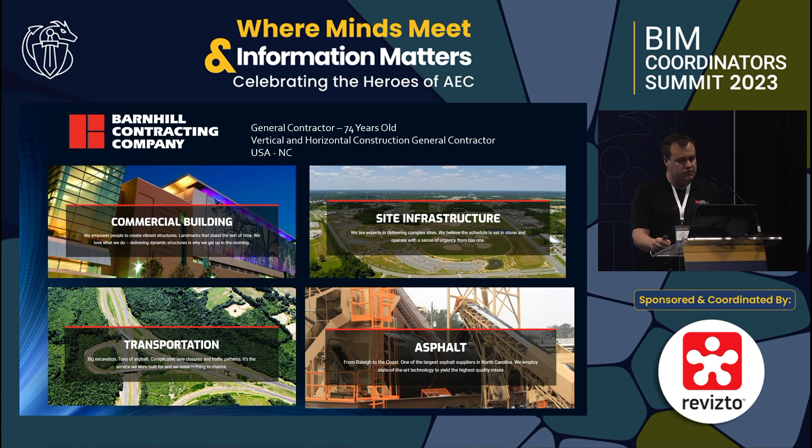And we're kind of unique. We're actually a horizontal and a vertical builder. Typically, you don't see both of those all encased into one. So we do vertical construction, site infrastructure, transportation, and asphalt.

This is what everybody understands about where constructability is and where the industry is, right? The top 5 things, and the comment that we're always made is we always got at least 2 of the 3. It was either going to be on schedule, on time, it was going to have a cost, and then the quality. Now it's very hard to get one of those things, and clients more and more are trying to understand why that's happening. And there's a variety of reasons.

But one of the things that we as an industry, especially as the GCs that drive that process, we have to fundamentally change the way that we produce constructability reviews, right? It's always been to a point where we were on 2D drawings, and now we got to take that to the next step and bring in the 3D environment even more.

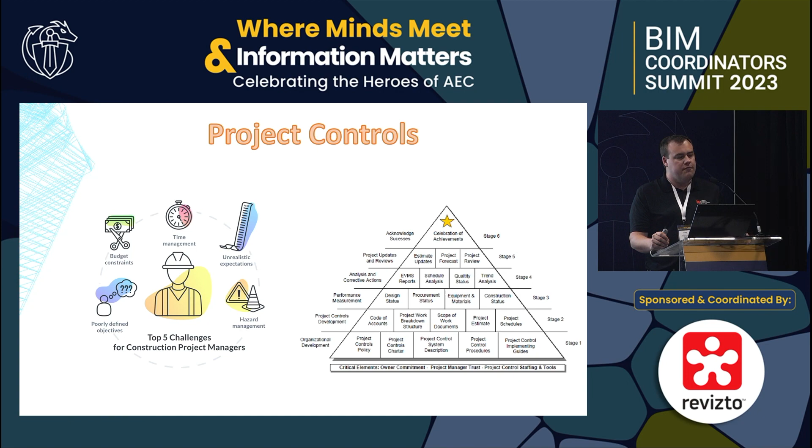And that process of being successful with those top 5 challenges of project managers all leads to the pyramid that you see there, and everyone in this stage and in this space that we're in understands that this is the process of what it takes to be successful, and then hopefully at the end you can celebrate those achievements and cut the blue ribbon.

So what is constructability? It's a pretty straightforward term for most of you here in the stage, but more broad to the industry is how buildable is it? And it's just a technique that's used to be able to look at a process in pre-construction and work its way all the way until we get to construction, and then it turns into coordination.

And what we've done over the years, in the last 10, 15 years, is we've used the model in the coordination predominantly. But what we've got to do is we've got to really start to do what everybody else has talked about and bring that more into the pre-construction aspects as the new technology progresses.

And the idea is to identify these different aspects. How much is it going to cost? What delays could we foresee happening? And then where's the overruns or quality going to suffer? The projects are getting more complicated.

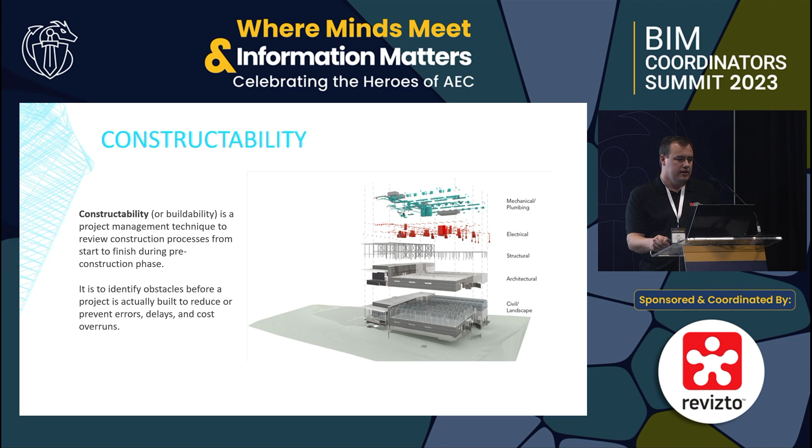And that's what's interesting about this structure, is that it's a really beautiful glass structure, but if you do something on one side of it, you got to do it on the other. It's completely imbalanced in how that works. And there's only so many in the world that look like this.

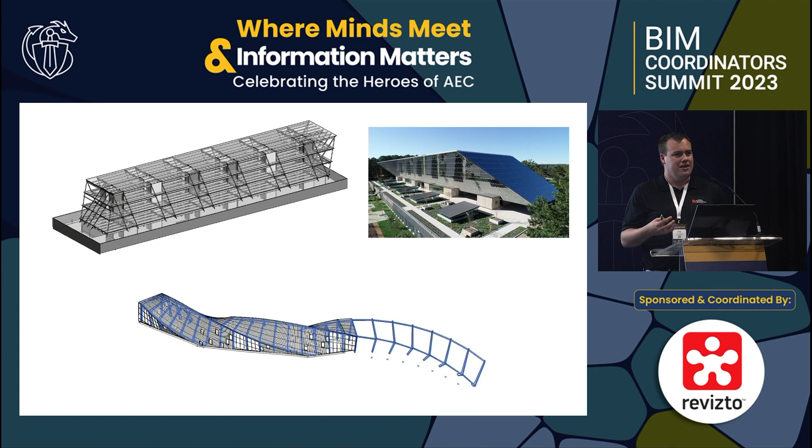The other one is kind of unique. It was a project that we were working on that was for a DNA company, and they wanted to construct something that looked like a DNA strand. That's pretty hard to do, and so trying to work through those processes of does this make sense for the company? Are you trying to use this as an architectural feature, and is the end use what you wanted to see?

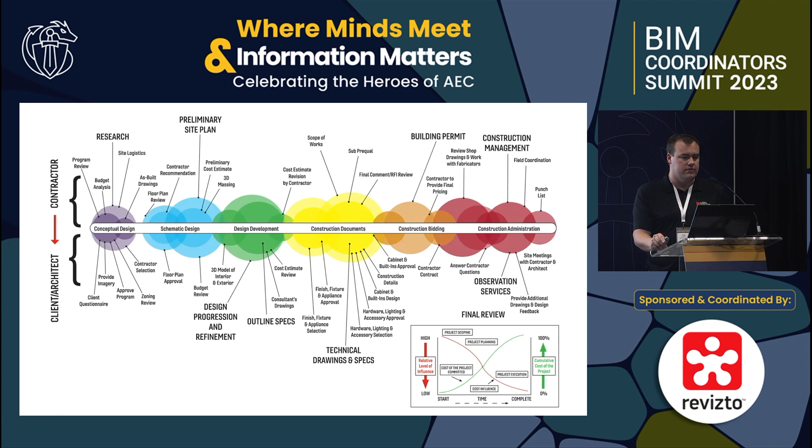So in the front end of this, as we're working through this massive ordeal of all these different people that are involved in this process, that constructability aspect is very important. And it is really focused on the left-hand side of the page.

But what we have to get across to the massive industry that we are in is that it incorporates the way that we're going to build the building as well, and use that model not just for coordination practices within it, but also to use it for estimating, to use it for scheduling, to use it for logistics and how we're going to physically build the building.

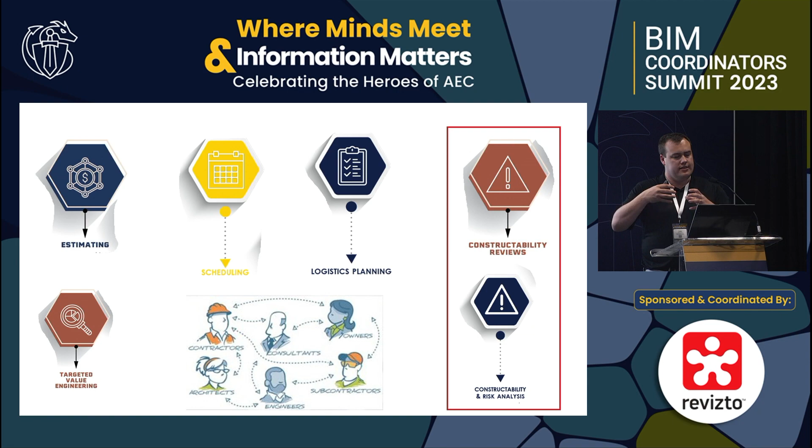Because in the world we live in, we have always fallen into this process that the model is static, but we're building a dynamic world. So that's not something that we need to continue. We need to take that and incorporate all these different concepts together. Put that model of what it was always meant to be in the center of this whole process, right?

And yes, there are things that we have to get better on for every single part of the circle, right? The circle is what we do every single day as a GC. We have to look at the expectations of what the owner is providing us through the lens of the designer and work through those processes through design. With that, as we've talked about, fabrication and logistics and 4D and scheduling costs are all important while we're in the process of building the building.

But what if we could start that a little bit sooner in that process? And then finally, as other stages talked about today, digital twin is going to be a major part of operation and maintenance in the future. So why not talk about that at the very, very beginning of a project versus waiting until we get involved in it? And in the States, it's become a really big issue.

To the point that a lot of state representatives across North Carolina and other states have said that GCs are failing at constructability reviews. We don't have the right people in place to do it. We don't have the time to work on that. So those are the things that are kind of frustrating, right? If we don't take the time up front, then we're going to get really messed up at the back end of it. And it involves two different pieces.

We have an aging workforce that is going to leave us in a very, very short period of time. And we have a young workforce that's eager to join us, but they don't understand where they fit into that industry. And so with those two perspectives, we have to bring them along to get them to a point where they can take over for the next group. Just as we staff projects with the experience that we have, we need to staff constructability reviews at the front end a lot better with experience and with new talent.

With being able to do that, you could take the ability of completeness and assign that to somebody that's brand new in the industry, right? Because in this process, they're learning the ways of what we do every single day. And then on the back end, you have the person that has 35 years, 40 years of experience. And you allow them to analyze the building components and bring the completeness together to complete a constructability review more effectively.

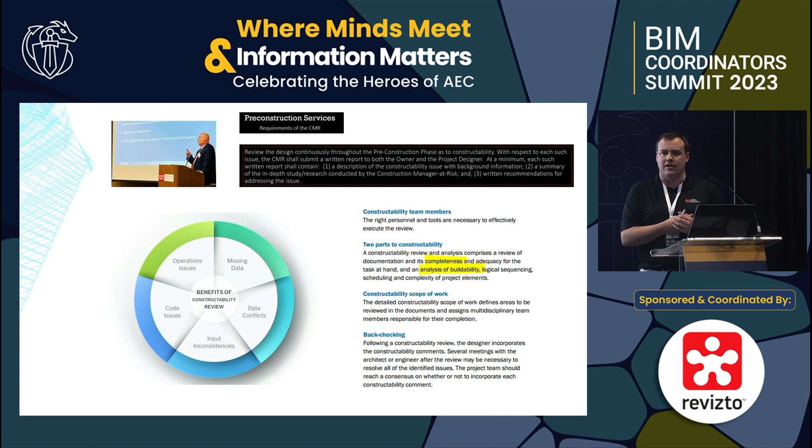And then finally is the back checking. So we do all this work on the front end, but then we don't go back before we actually sign the contract to get started, and we need to back check that work. One of the guys in the US that I'm really fond of is Jason G. Smith. It's a great book if you guys are really interested in this topic, and he created a company called Construction Analysis and Planning LLC, and he developed 5 basic rules that we use every day, right? But we're not focusing in on them enough to be successful.

So first is, build the project. Don't focus solely on the problems. We have a huge issue in this industry of blaming designers, and we can do it all day, right? I mean, they don't have enough time to complete their task. We don't have enough time to complete our tasks. So why are we blaming them for the same process that they're having an issue with?

The other thing is we solely focus on the problem at hand, but the project is what's important. How we build each of these different things becomes the soul of what that building is going to become, and don't assign blame.

The next thing is review the interface of various systems. And it's not just the MEP systems, it's the systems of envelopes. One of the biggest challenges we're seeing, just in the last presentation: these envelopes that are being developed by architects and being pushed by clients to have a beautiful building, they're getting more and more complex. So just because we have a system ingrained into us to look at, here's an issue, try to solve it, we need to look at the big picture and how it interfaces together using the model.

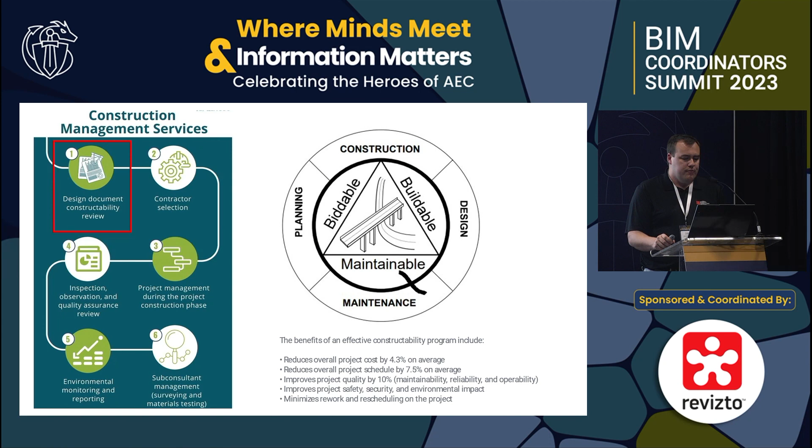But how do we do that with where we're at? We still have the idea in most countries, especially in the US, that the model is not a contract document. It drives us crazy. It just is where we're at. In Europe and other countries, it is a contract document, and there's more methodology behind it. But where we're at, we still have to take what we currently have and just make it more collaborative.

So with the people that are still into the 2D drawings because that's the contractual agreement, why not make it more collaborative by taking the 2D plan and bringing that into a collaborative environment like Procore, and use the completeness review from the people that are just starting in the industry. Go through a checklist of exactly what should be in the drawings, if it's complete or not complete, and really try to understand from your employees, do they know what they're reviewing? So that's a great check on the industry as a whole for the younger generation.

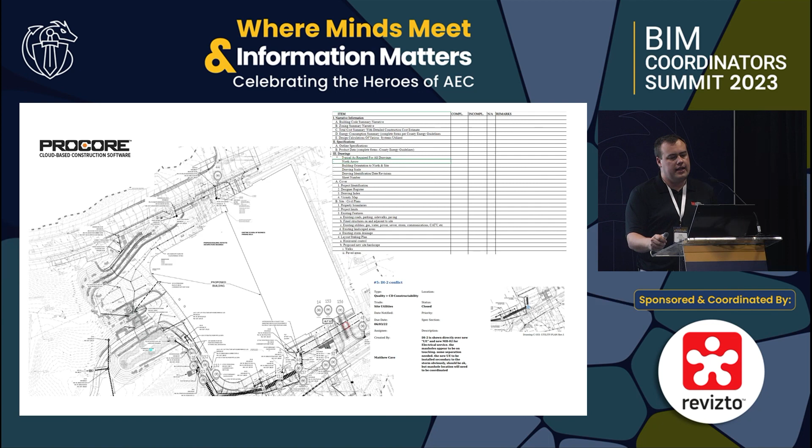And then for the older group that's there to drive it forward, you take that information and you combine that in a collaborative environment and still do a 2D review. There's still a point in which we have to move from one to the other, and that's what's in process right now.

The other thing, like I was saying earlier, logistics. Let's stop looking at logistics just in a 2D environment. Let's take the resources that we would typically use during coordination and bring that into an environment where you can actually logistically plan it in a 3D environment that's shareable to the team.

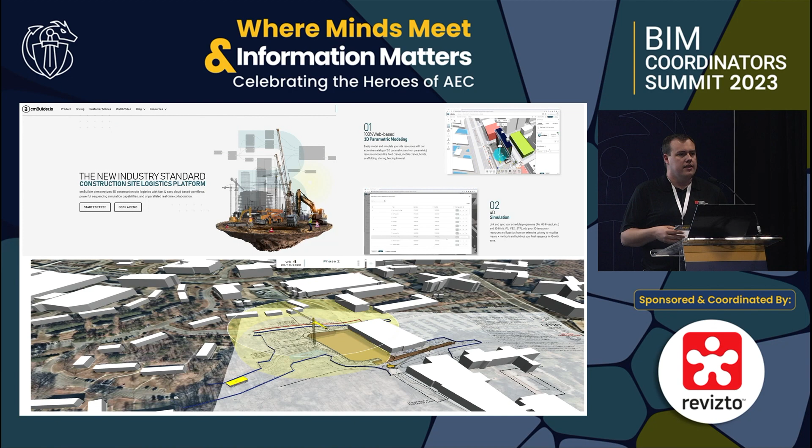That's a product that we're using now. It's called CM Builder. It's just been in the last few years that they developed it. But you can see just from the basics of it, it gives you that overall idea of what you're trying to do, and then it gives you the resources to plan crane placement. It gives you the ability to understand how the environment is going to be impacted.

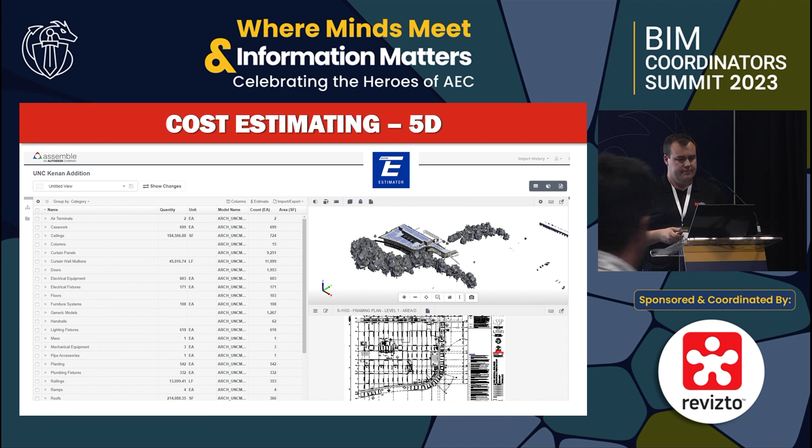On the next front is the 5D. Take that information that you see within the model and tie that back into our traditional takeoff processes, but incorporate that and let pre-con understand the building that's being estimated. Another piece of the puzzle that we always forget is that the issue with BIM in the past is it always was static, but we're building in a dynamic environment on sites. So why don't we include that?

Hexagon with their product of Agtek allows you to do that. You can look at it in a regular takeoff scenario, but you're able to then take that information that has been created in that and pull it into the BIM environment and use that to look at how the site interacts with the project. And that is looking at the site as a whole with dirt moving back and forth, or looking at it with utilities and how the utilities are going to generally impact the project.

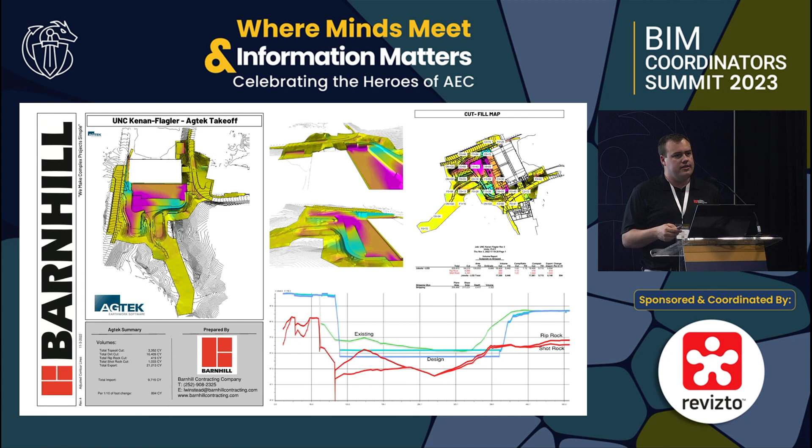So with taking all this information, we can put it together in a product like Revizto, and you have a full-blown collaboration of all these different things. And that's on the reality capture front, that's on the laser scanning front, that is on the subsurface utility engineering, which is known as SUE. And you can then take that process from a constructability aspect, and you can then be prepared better for coordination. And with the advent of 360 photos and other techniques, you can then start to track the progress.

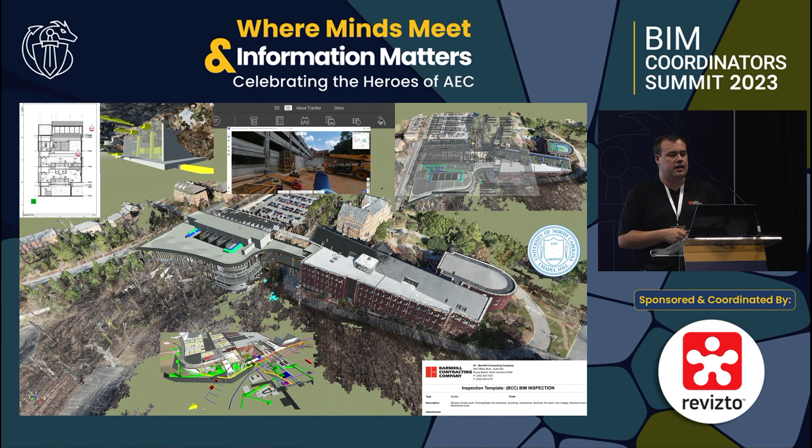But this is where we're at today. The next goal of it is to take this and do inspections and to make it a more dynamic process. It's more of a static process, and we're leading to a dynamic process. So how do we go to a more dynamic process? Well, the advent of Evercam and what they're doing with AI and the ability to take the information that you've planned in that static environment.

And let's not look at it from just static pictures, but what if you could take the construction camera that we all know and we've used in the past as a generic time-lapse camera, and why can't we take that into a dynamic environment by tracking the schedule using that concept? So this is a great example of that same project that took all those different pieces from the different aspects that I've talked about, and now we put that into an environment that now we're tracking progress over time. And we're starting to go from constructability into coordination.

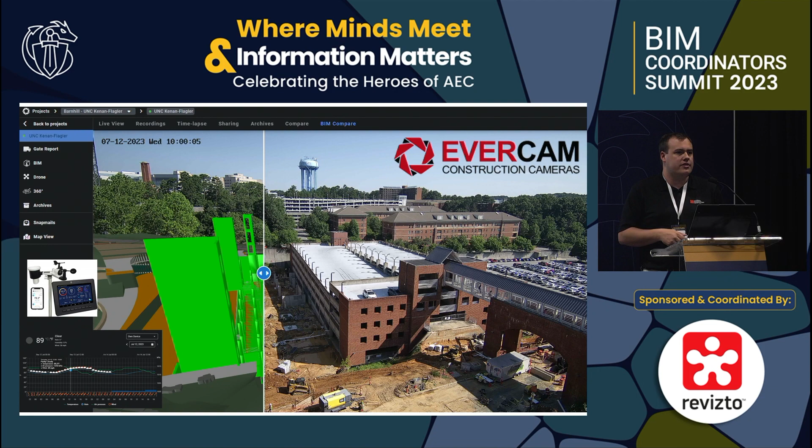And that's a big thing in the industry as a whole, whether it's also with different aspects of theft on a job site or just how production of a job site works. Concrete pours and tracking that over time of how much time it takes for a truck to go from one step to another.

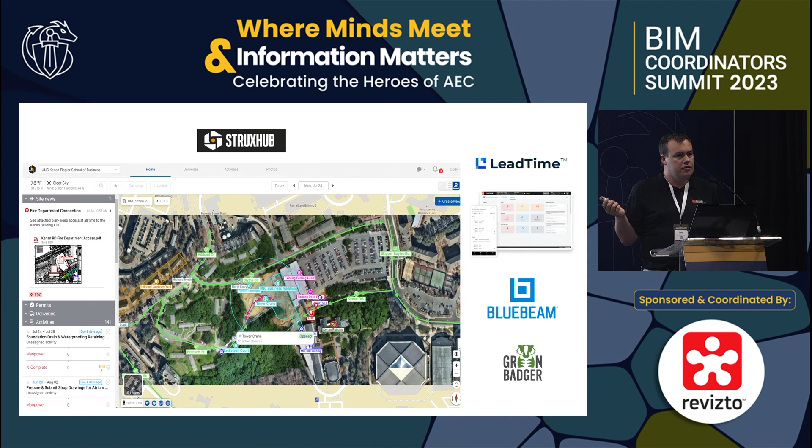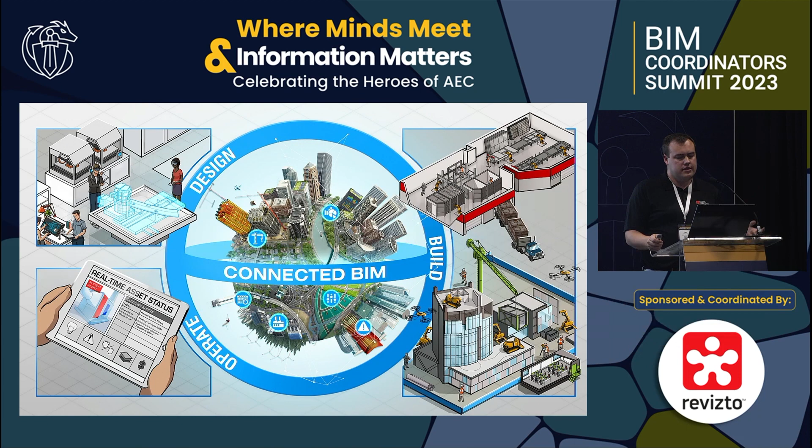And finally, you take that process as a whole, and you take the 2D and the 3D, and you can then start to look at the procurement of a project, so that by the time you get through all these different things and you figured out how you're going to build the project, you create what we're all going for. And this is the connected environment that every stage is talking about. Taking it from constructability of design to the built environment of logistics and construction, and then finally with the digital twin with the handover to create the connected BIM. That's my final thoughts on this.